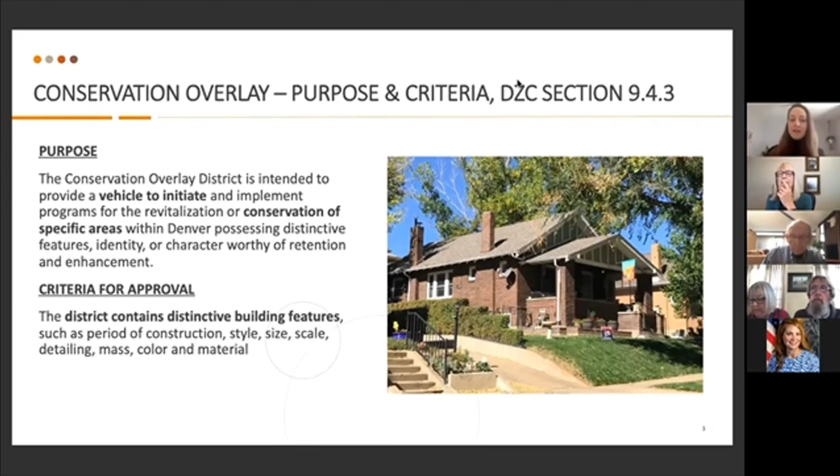So in order to get going on a conservation overlay, you do need to do some good research and categorize and catalog what those distinctive features are. So they could be an age of a neighborhood, style, size, scale, mass, any of these things on the slide here.

And then for those who aren't familiar, the way an overlay works is that it really does overlay on top of existing zoning. So there are rules, there's existing zoning for every part of the city. This can modify some of those things, but it sits on top of it. So baseline regulations stay in place. When there's a difference, the overlay takes precedent. But also, very importantly, conservation overlays can't change uses inside of a zone district.

So for instance, Harkness Heights is a residential neighborhood. It's a residential zone district. This overlay cannot change that base fact, but it can change physically how things manifest.

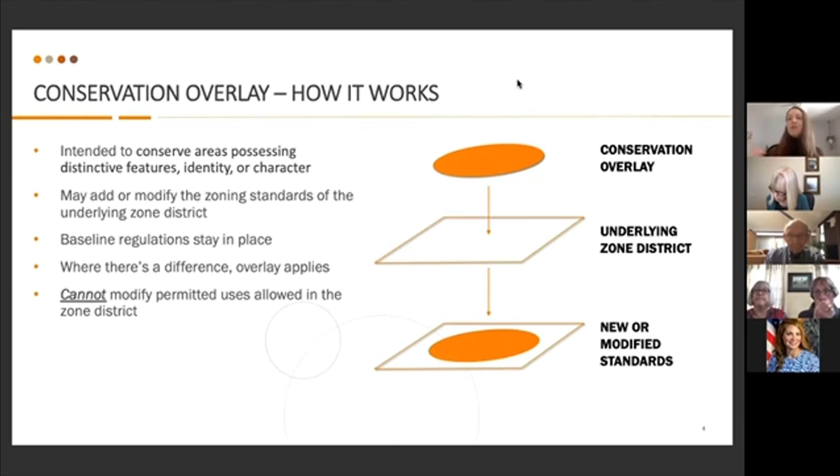So there are currently 5 conservation districts, or overlays, in the Denver zoning code. They're all really, really fascinating. A lot of our inspiration came from the Potter Highlands Conservation. I definitely encourage you to check out some of these neighborhoods like Krisana Park, which is a really fantastic neighborhood, more kind of modern style.

But this would be the 6th. It would be Conservation Overlay 6. And that generic name, the planning department helped us. This was a very back and forth iterative process with them. And the reason this isn't necessarily called the Harkness Heights overlay is because they thought that what we had come up with was so useful to protecting neighborhoods with similar characteristics throughout the rest of the city, that a little more generic name, bungalow, kind of sets it up for being able to be applied other places.

So as for background, where is Harkness Heights? If you're not familiar with it, it's a beautiful neighborhood up here, technically in the Berkeley neighborhood. It's a subset of that. It's relatively small. There are 339 parcels zoned U-SU-C.

So that's a single unit C. The C refers to kind of an average lot size. There's a couple of other parcels in there that are a little different, but we're focusing on applying this mainly just to that zone district.

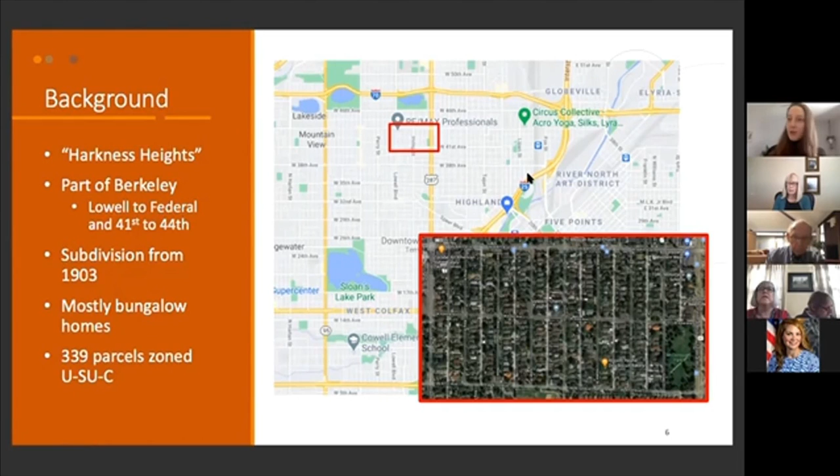And this is a pretty consistent subdivision. One of the earliest subdivisions started around 1903 and the following decades. It's pretty consistently bungalow forms, but there are definitely some 4 squares, there are some Tudors. So there is a bit of diversity, but it's very bungalow.

The concerns that the neighborhood started to have are primarily the ones up on the screen here. And this is kind of what we dialed down into as our guiding principles throughout this whole process. So a big one was scale and massing.

This picture illustrates, and with the caveat, these are horrible designs. They are not meant to be super realistic, but except the one in the middle, that's a typical 1-story bungalow that you would find in Harkness Heights.

The purple boxes on the picture below, that's the bulk plane. That's the invisible kind of glass box that constrains development that can happen under the current zoning code. And unfortunately, for Harkness Heights with these little bungalows, what you are allowed to build inside that box, inside that glass box, is really out of character with the scale and the massing of what's there.

So that's what those 2 kind of monstrosities on either side are. Again, those aren't necessarily super realistic, but in terms of massing, yes, you could build something that big.

So another thing we wanted to address was siting and building width, the relationship of the street. So really, what makes Harkness Heights when you walk down the street? And how can we preserve that? And then privacy was also another value.

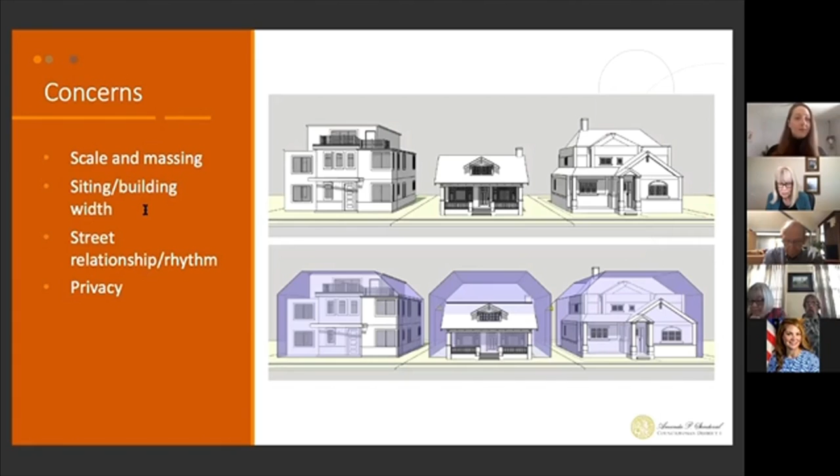The objectives that came out of this was to basically ensure that when new development happens, because it will, because this is not a historic district, it's not completely preserved as is, but when new development does happen, whether that is hopefully not a scrape, but maybe a pop top or something, that it actually feels like it fits in with the rest of the neighborhood more than what we're seeing in other neighborhoods, what can currently happen.

Also, that privacy and solar access is maintained, and that the setbacks and where the buildings are positioned on the lots is maintained. And that there's this rhythm, this kind of rhythm of porches and stairs and 1-story and then 2-story is preserved because it's so cohesive currently.

But that there's also a bit of design flexibility. And that was a lot of community conversations about this. This is a long process of basically keeping to these, drilling down to these core values.

Our process, community discussion started in 2016, maybe before. Tom can pop in and correct me later, he's been instrumental from the beginning. This has been a long process. Former Councilman Espinoza was incredibly involved, and he brought along consultants, PelOna, who worked with the community to develop the first draft, which included tons of background information and research and the foundation for the proposals we used going forward.

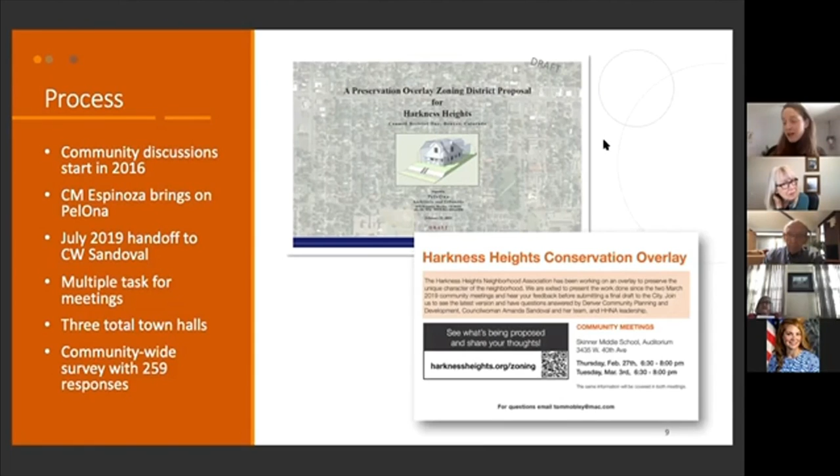Other than that, we had a process that was very, very iterative. If anyone is interested in this in further depth, you're welcome to contact me or anybody else on the team, and we can go into the details. We had a small group of dedicated people who really dug into the details, including myself and sometimes the planning department. We had a larger task force of maybe 20 people. And then, of course, we went back to the entire community as much as we could at certain points. It was this cyclical process of refinement.

So the proposal I'm going to show tonight is a little different than what's been seen over the last couple of years, and that's a result of a lot of work. From a proposal we'd get group buy-in from various levels and then do really significant modeling and testing - talking to architects, myself doing research, and then going to the planning department who provided a lot of really great feedback. From that, we'd come up with refinement and suggestions and maybe a new proposal that we'd then go back and vet with the community.

We went through this process again and again until we came down to final elements that were both easier to administer - the planning department needs to be able to actually administer these things - and make sense fitting in with the rest of the zoning code, as well as adhering to the core values the community has expressed from the beginning. We also took out things that might have been extraneous, or that when we polled the community, people said they didn't want. With this whole process, my biggest advice is to be humble and be flexible and recognize that there's going to be a lot of work involved.

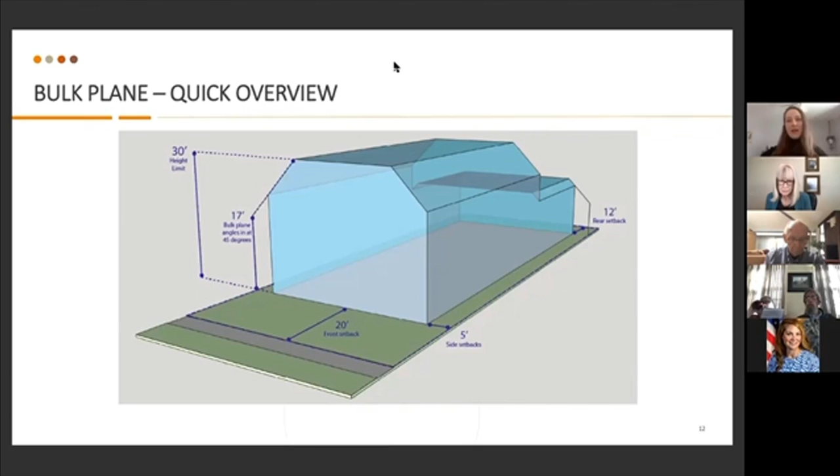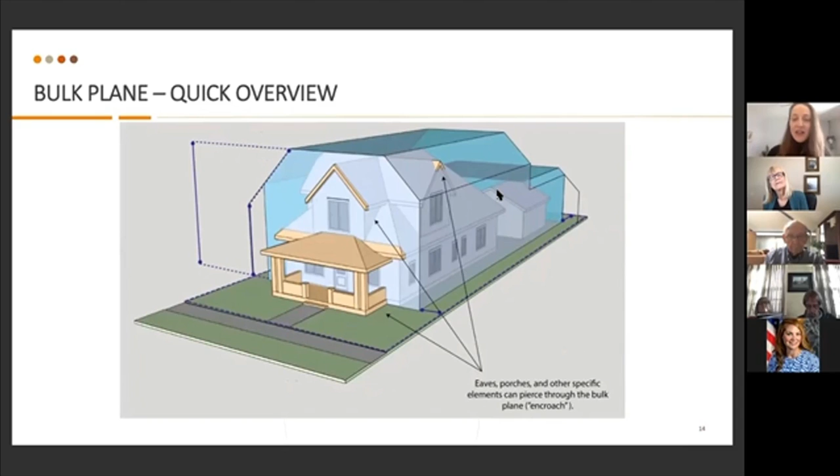Quick overview for those who aren't familiar with this glass box I referenced - the bulk plane is that invisible boundary that contains development to a degree. This is specifically in our zone district, U-SU-C. For a downtown, this box looks very different - like 20 stories high. This is how a house would fit into this glass box, and it's a good example because you can see there are a few exceptions: porches can stick out, some eaves can stick out, part of the top of the roof can stick out. But in general, a house has to fit into this glass box.

So this is what the glass box looks like currently, and I wanted to show this to you because I think it illustrates exactly why we made some decisions and how they're going to help new development fit in better. Currently, you can build up to 30 feet in height, and actually a little higher on wider lots, but generally 30 feet and 2.5 stories.

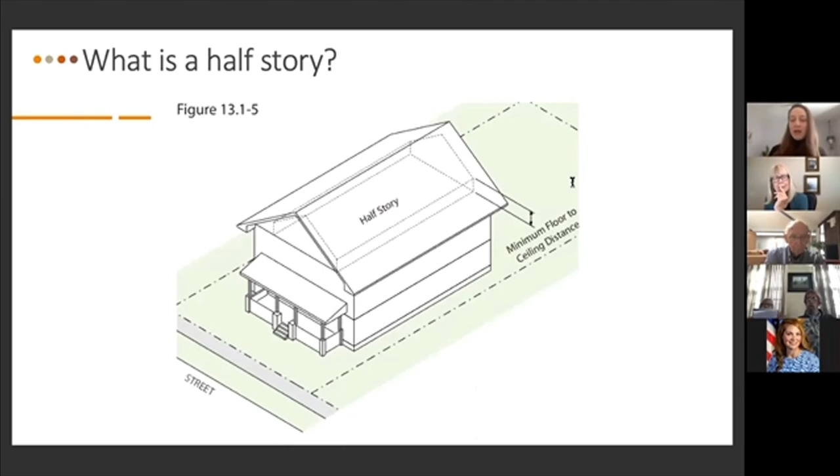So what 'half story' means is kind of weird—it doesn't refer to height, it refers to square footage. So a half story can actually look like a third story from the street. It just means the footprint of that story is smaller than the stories below it. This rule was leading to what people object to as that 'wedding cake' look, or a 2-story contemporary house with a little 'dog house' on top that's access to a rooftop patio. That's why 2.5 stories can allow that.

Then we've got this 45-degree shearing on the side. This helps with solar access and keeps development in check. Currently, it starts at 17 feet up, measured from the side of your property.

Then we've got setbacks—they happen in the front, sides, and rear, and that helps place the building on the lot so it's not crowding the front, the neighbor's property, or too far into the alley. There's also an overall lot coverage limit, but other than that there's no restriction on the square footage of a house. You just can't physically build more than 37.5% of your lot, and that includes garages and everything.

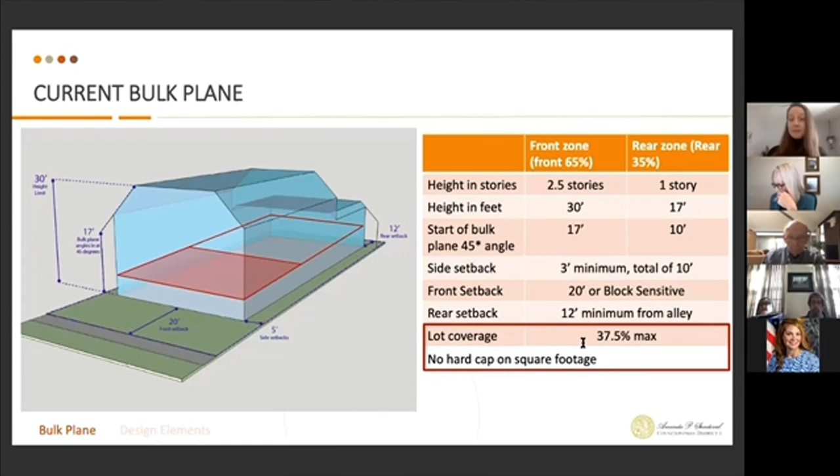So this is what we have currently, and this is what the overlay does—the pink box shrinks that buildable space so that when a new building comes along, it's a feasible building under our new bulk plane, and it's going to look and fit in better than something built under the current bulk plane.

We tested this a lot. Our new bulk plane start height is 14 feet, the start of that 45-degree angle, so that already brings it down a little. We'll have lower height limits, differentiated by pitched roofs versus low-sloped or flat roofs. There are also some changes to the side setbacks, and importantly, the community decided it was valuable to have a limit on square footage. I'll talk about all of these in more detail now.

Side setbacks: Harkness Heights has a consistent pattern of larger setbacks on the south side, likely deliberate to allow sun access in winter and avoid shading the building next door. We wanted to preserve that siding pattern, keeping houses narrower rather than taking up the entire width of the lot, which looks out of character. The new rules are still graduated based on lot width, but mandate a larger setback on the southern side.

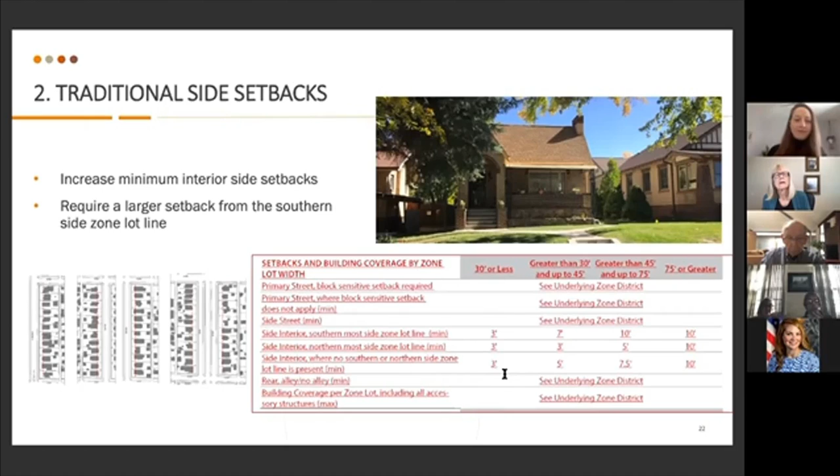Back to the idea of the square footage cap—we had a lot of discussion about this in the community. We based it on the current largest homes in the area; the biggest one is just over 3,000 square feet. This was in response to seeing homes built, especially around the Sloan's Lake area, up to 5,000 or 6,000 square feet, replacing smaller, modest bungalows with gigantic homes that feel very out of context.

There are provisions for an additional 40 square feet for every 100 square feet of lot area—so if you have a gigantic lot, you could build a bigger house, which is how it is currently, with beautiful grand homes especially on the corners. This does not apply to basements, since incentivizing basements was a big goal of the community. A lot of existing homes have basements—it's a great way to add livable square footage without adding to the bulk of the structure above ground.

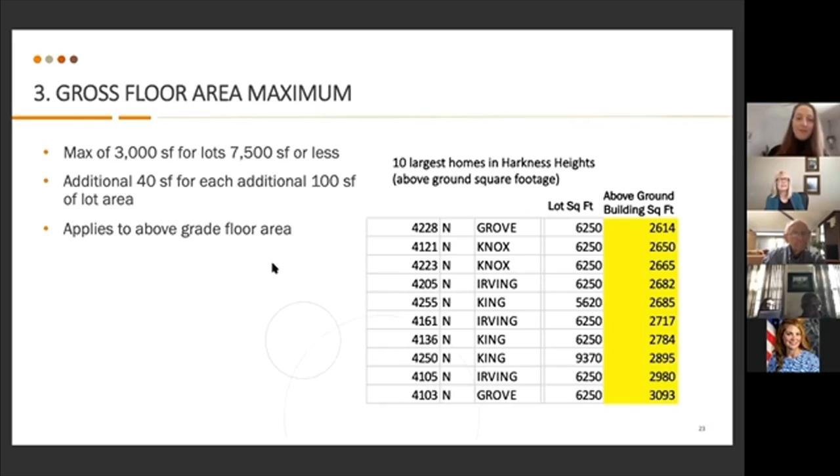Building height in feet and stories: we have two different height caps. If you want a more traditional pitched roof house, you can build up to 28 feet. If you want a more contemporary, low-sloped roof—the technical term for flat in the zoning code—you can build that, but it has to be no more than 22 feet in height.

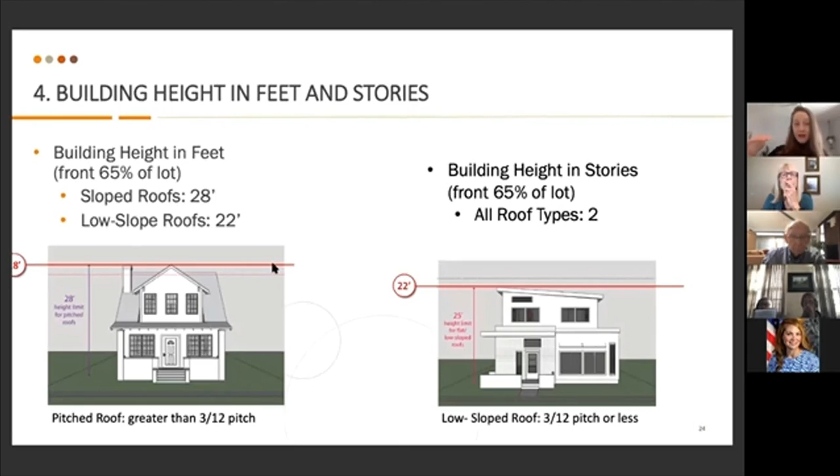In addition, if you build a flat or low slope roof structure, you have to step back the second story. This is to mimic the slope that would happen normally, that sense of mass decreasing you get with a pitched roof, and help it fit in better with the existing pitched roofs in the community.

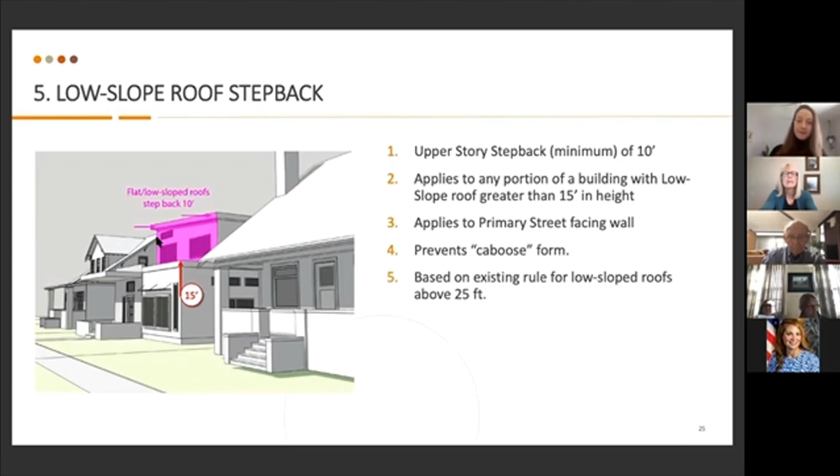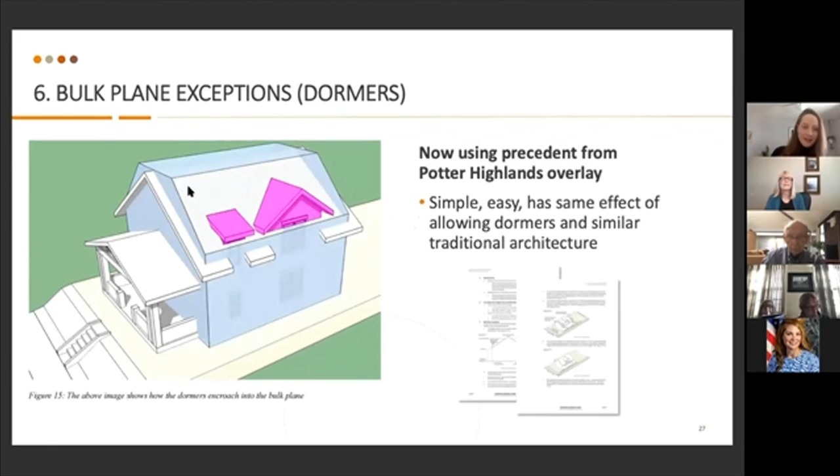And getting near the end, porches, requiring porches. Currently an entry feature or a door of some sort is required if you build a new house. But Harkness Heights is characterized by these beautiful giant porches.

They do a couple of things. They provide a sense of transition from public to private realm, a chance for neighbors to sit out on their porch and interact with other neighbors, as well as this sloping of mass. You have a smaller one-story mass, and then you get the bulk of the house behind it. So it's a super important characteristic, and we are requiring porches.

This stuff applies generally to a brand new build. If you have one of these homes on this page, for instance, and you want to build a second story, you're not going to be required to build a brand new porch if your porch isn't big enough. A lot of these really just apply to brand new builds.

So there's a minimum porch size, minimum porch dimensions, it has to have some sort of little wall or fence around it. It has to have a roof, and it can't be recessed underneath a story. It can't be kind of like a cave that you go into - it actually has to stick out.

And getting close to the end here, upper surface of first floor. A lot of traditional design has a base, then a first story, then the stories above it. Whereas some contemporary architecture, such as the image to the far right, is just built slab on grade. And it disrupts the rhythm that's very consistent in this neighborhood.

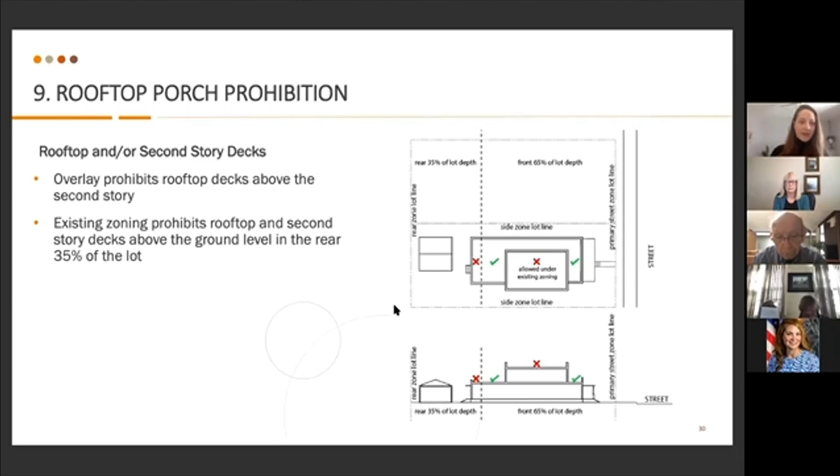But this, similar to Potter Highlands, prohibits rooftop decks on top of a second story. So here's the summary of all 9 elements we talked about, and I will open it up to Q&A - I think we have a good 15 or more minutes for question and answer.

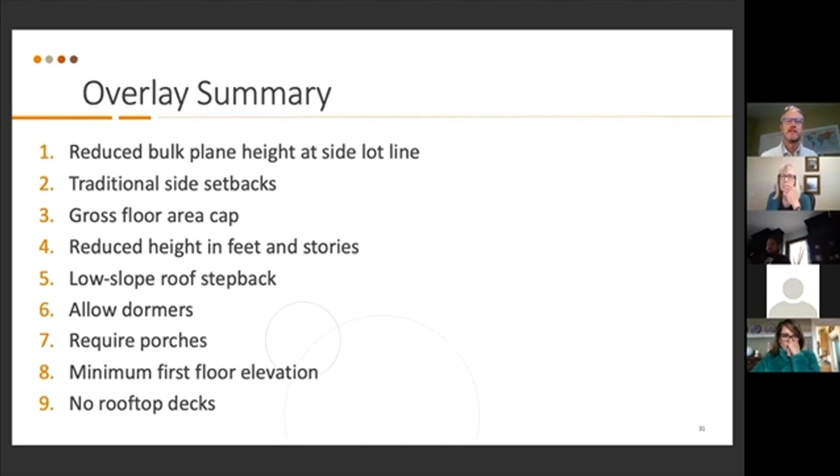Great, I see a question about what date determines historic. That's an interesting one. Does anybody... gosh, wait, before we leave this—the question was asked and not answered.

What if you have an HOA and a conservation overlay simultaneously? If there's a conflict, which takes precedent?

Yeah, that's an interesting question. So basically, an HOA can't countermand zoning regulations, or counter them, for example, by being less restrictive than zoning. So if the zoning said there was a maximum of 2 stories in height, the HOA can't say, no, actually you can build 3 stories. But an HOA, like a conservation overlay for example, could be more restrictive. The HOA could say, no, we property owners have agreed and signed this legal document that we will not build taller than 1 story, even though the zoning allows 2. That is possible. So essentially, when there's multiple things going on, the more restrictive of the things is the one that will take precedent.

I want to note though that HOAs, again, that's not a city thing. That's just a private legal agreement among property owners. And in some cases, the city wouldn't necessarily even know what the rules were unless we dug into the legal details of them, because we're not enforcing those rules. It's just privately enforced.

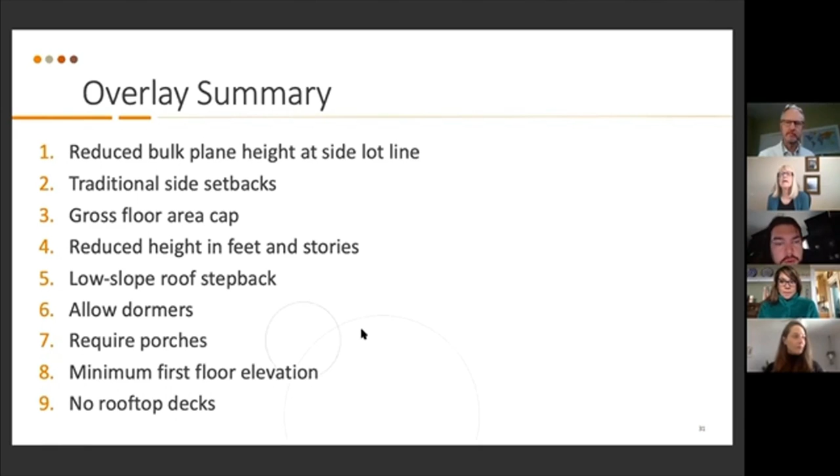So I see another question from Mark. Harkness Heights doesn't allow accessory dwelling units right now, so we didn't build for that. That was something Harkness Heights had a long conversation about. We don't have any regulations on ADUs at this time because they're not allowed within the zoning. Everybody would have to apply individually to get an accessory dwelling unit. That's a good question because we had that same question asked at the Denver Planning Board, so maybe we can take that on if that's what the community and residents of Harkness Heights would like us to do. But for right now, it's not within the zoning code, so we did not address accessory dwelling unit height regulations.

Amanda, this is Tom. Just to add to that - you were at that meeting. One of our very first organizing meetings of our group was that question. We raised it: did we want to include any discussion of ADUs in the overlay? There was a strong feeling among the group that it would have been very difficult to address in that format and very controversial, so we deliberately left any discussion of ADUs out of this overlay.

I'll also add, I have the slide up here too. None of the changes we're proposing actually alter the rear zone. The lot's divided into a front 65% and a back 35%, and detached ADUs have to live in the back 35%. But these rules, except for side setbacks, wouldn't impact anything back there. Detached ADUs have their own set of standards that we didn't touch. We've done some looking into this and modeling, and even though this is hypothetical since they're not allowed currently, the rules that would affect how a detached ADU could be built aren't being impacted by the overlay.

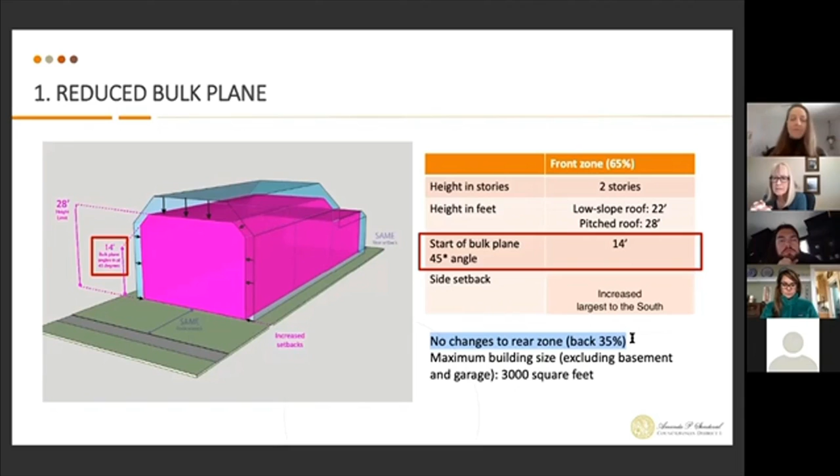Just want to time check you, Naomi. It's 10:10. I see one more question here about whether a Chapter 59 area has to change to a new zoning before adopting an overlay.

I do want to answer a question really quick. I saw a question earlier about historic significance. My understanding as a trustee of Historic Denver is that when they set a historic district, they pick a period of time of significance to peg everything to. It's also my understanding that something has to be at least 50 years old to even be considered for this, because there's been conversation about the post-World War housing built in southwestern Denver and whether that will one day become historic or not.

Thanks, Ian. Abe also put in a little more detail about historic districts in the chat. So thanks, Ian - I think we should move on to our next overlay. Again, if anyone has further questions, feel free to put them in the chat and we can reach out to you later to answer them. I'm going to put my email, naomi.grundwitz@denvergov.org, in here so you can reach out to me personally, and the district office email as well - that'll go to all of us.

All right, I will try to move through this a little more quickly so we have time for Q&A, but I think you'll all be excited about this overlay as well: the active centers and corridors design overlay. It's a bit of a mouthful. Same background - we'll briefly talk about how this overlay differs from the other project background, and then what's in it. Yes, we will send the presentations out so you can review them, and this is being recorded.

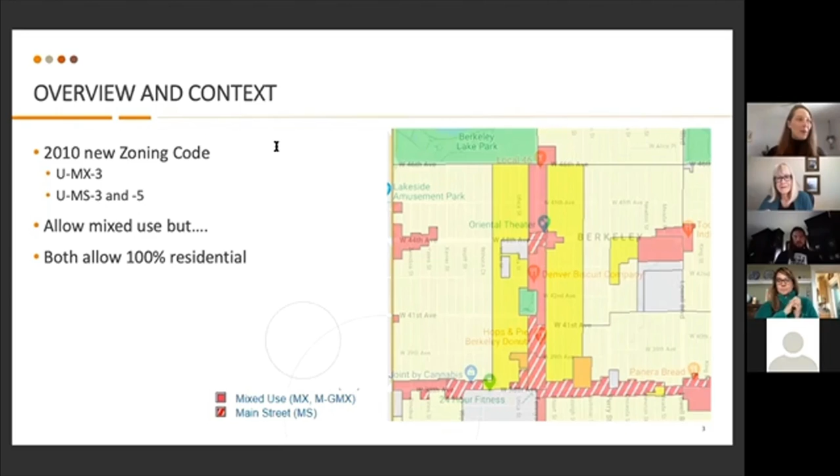So, the active centers and corridors overlay is specifically about traditional shopfront commercial corridors that, in the new zoning code from 2010, allow mixed use but also allow 100% residential. If you've been to Tennyson Street in the last 10 years, you probably know the changes we've been talking about that the community's been concerned about. These discussions - and Christopher Johnson, our planner from the city who's on the call, has been involved with BRUN talking about this for a long time - go back with Councilman Espinoza. These concerns have been brought up along Tennyson, and in other districts as well, along South Pearl and Santa Fe. So the overlay we've developed with BRUN and with CPD is meant to also apply to some of these other small-scale traditional streetcar commercial nodes, as you can see here.

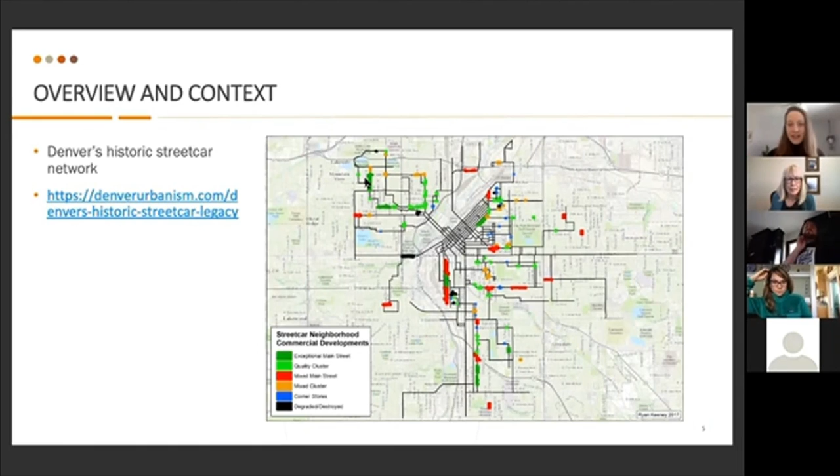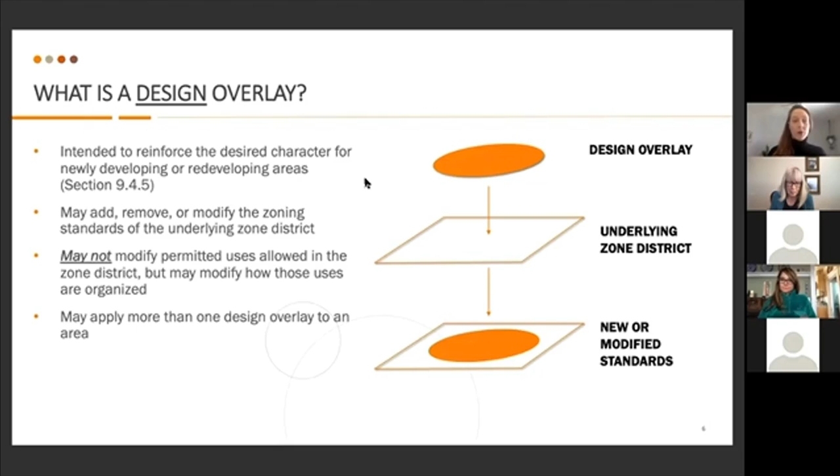This pattern led to commercial areas that were very walkable, super mixed use, and really pedestrian friendly. That's what this overlay is trying to preserve. This is a design overlay, not a conservation overlay. A design overlay is meant to guide development as it changes and redevelops. It can preserve existing patterns as well, but it's geared more towards what new development will look like. It can't deny uses that are already allowed, but it can modify how those are arranged in buildings. That's how we're coming up with one key component of this overlay, which is to require non-residential uses on the ground floor.

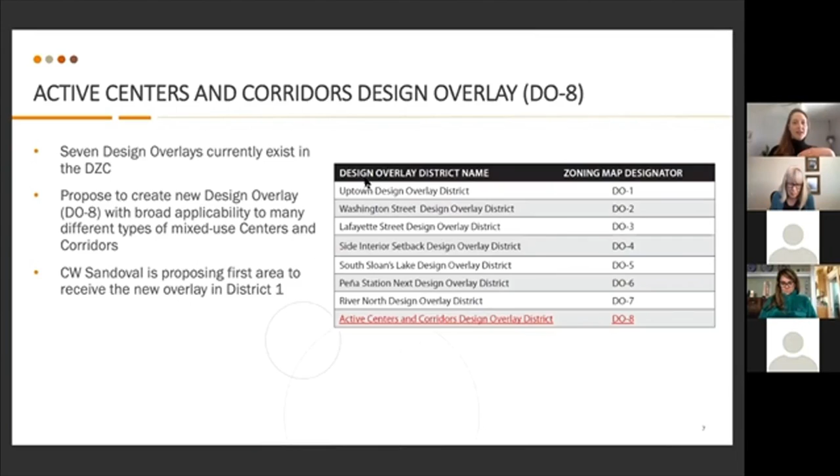There are quite a few design overlays that exist already. This would be number 8. The first area it would be mapped to would be along Tennyson, up here in these areas. I think I have another map later on. Sorry, I'm rushing through this a little bit.

Our process, again, was a very long, detailed process with BRUN. We've done town halls, which were right before COVID, like the last in-person thing that we did. We've also reached out to property owners with individual mailers, had calls with property owners, put out media advisories, and have a landing page that people can visit.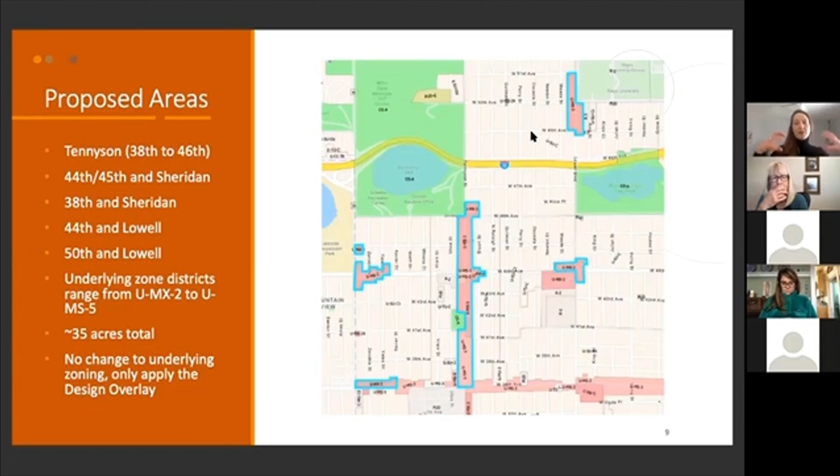I'm going to go through those real fast. The meat of this overlay, probably the most important part, is that we're not saying you can't have residential, but we're changing where that's arranged in a building. This standard says that for the majority of the ground floor on a building built in these areas, you cannot have an actual dwelling unit on the ground floor. It has to be some sort of commercial for most of it. There's a little wiggle room for smaller lots and smaller storied areas in depth, and you're allowed to have a lobby or something for residences above. But for most of the larger lots getting redeveloped, you'll have to have some sort of commercial on the ground floor.

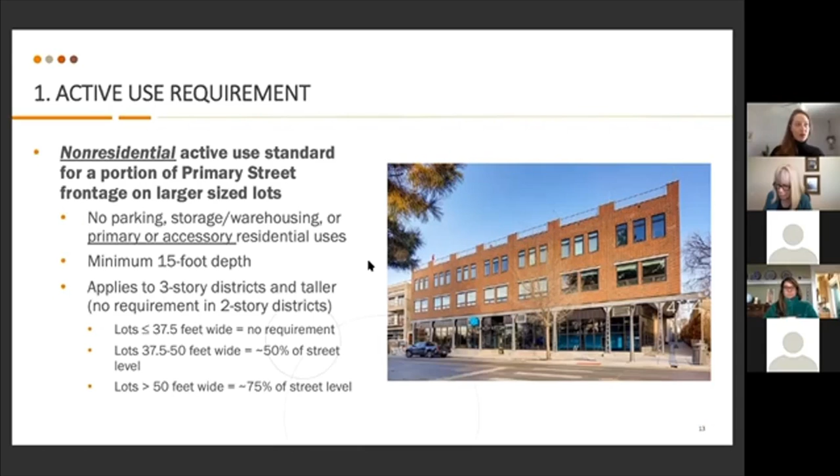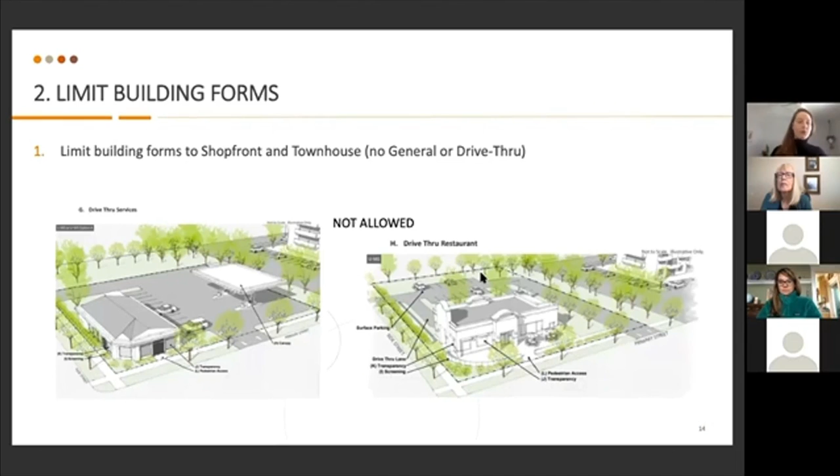Another thing the overlay does is eliminate drive-through forms, which are currently allowed on street corners in very specific cases, basically saying that drive-through forms are not appropriate for a small walkable shopfront area.

There's also an increase in where a building can be set relative to the sidewalk, to help create space for outdoor patio seating, things like that. Currently the standards are very limited, which is great for creating a consistent street wall, but also means that outdoor dining, which is really important now, tends to end up in the sidewalk, which isn't great for people passing by. If we have a bit more wiggle room for where the building is sited, there's more room for vibrant outdoor space, and it's not shoved into walking paths for people.

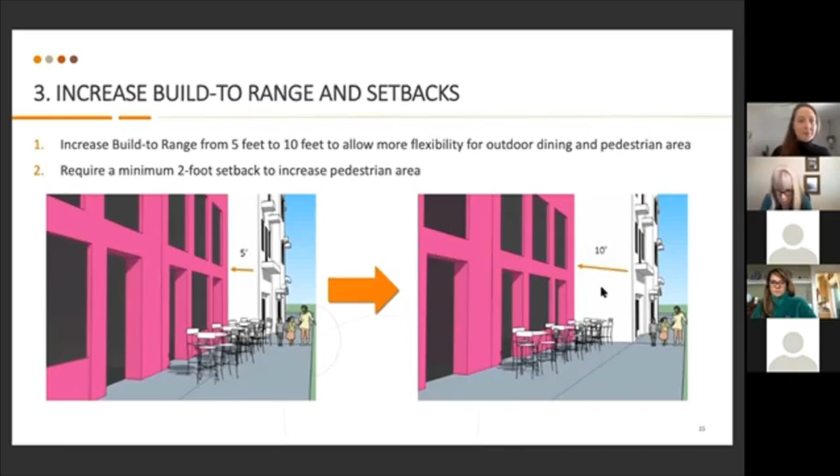Here's another really important element: most of the ground floor can't be residence, but in the places where it can, if you do have a dwelling unit on the ground floor, there has to be a setback. That dwelling unit can't be right up to the sidewalk. There has to be some outdoor space transition to the private realm, creating basically the pattern you see in these examples down here.

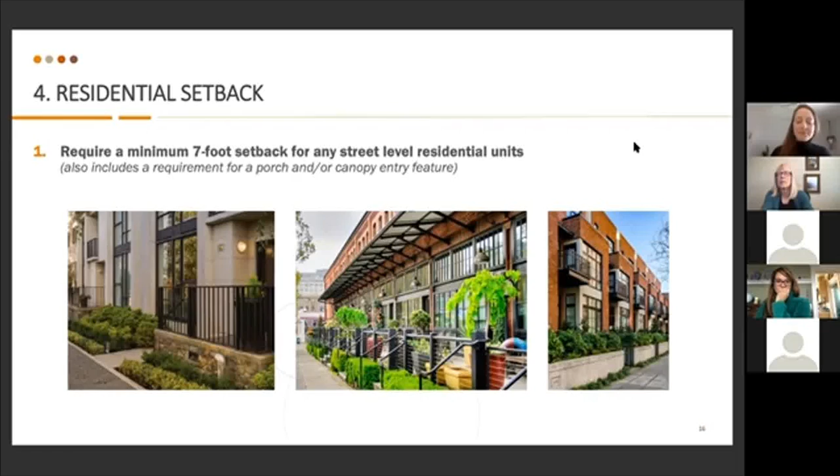Another thing we did is got rid of a kind of loophole, it's a little technical, but we know windows are so important. Windows on the ground floor are incredibly important for commercial spaces and for enjoying pedestrian activities along the street. So we reduced the alternatives, things that can substitute for windows, restricting that only to permanent art. This is not a great example of permanent art, but it illustrates the concept of how that space can account for windows. Permanent art is actually a really high standard that has to go through Denver Arts and Venues, and it's meant for very exceptional works of art on a building's wall.

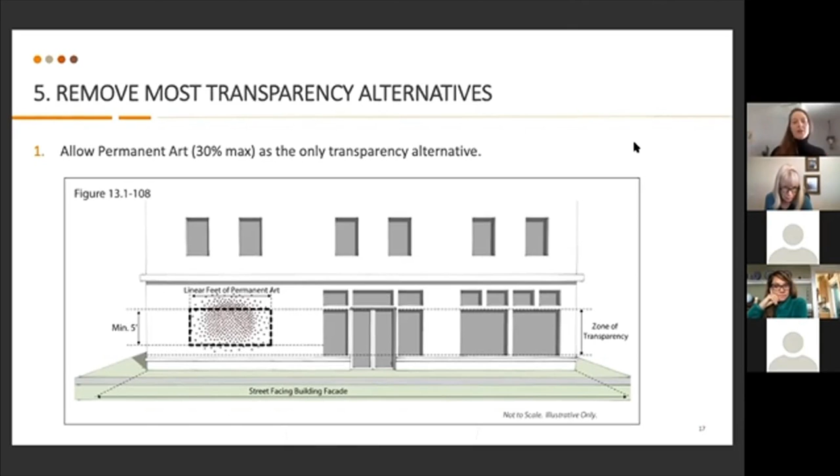And then first floor height. This is just a really good standard design practice that we're seeing happen in other parts of the zoning code and other overlays as well. Commercial space that is successful generally has taller ceiling heights. So we actually went and I physically measured with a measuring tape the heights of the storefronts along Tennyson to help us get to these numbers. So when a new building is built, that commercial space has to have a floor-to-floor first floor height of 14 feet. That'll help the commercial uses there end up being more successful and align better with the existing commercial spaces.

So that's it. It's a little bit simpler one, only 6 main elements, and happy again to open it up to Q&A. Christopher here is incredibly knowledgeable. I know we've got some of our lovely neighbors from BRUN also on the call if they want to chime in, and I'll let them go.

So I see in the questions, is the reason for creating the design overlay that requires commercial goal... It really comes from the community. When we had the big gathering with Councilman Espinoza near Holy Family, I want to say it was 2016, that was something that we gathered comments on, and it was a continual comment and continues to be a comment in Northwest Denver that we are losing commercial along Tennyson, and it is only turning into all residential. The neighborhood is very nervous about losing this commercial neighborhood serving retail. So it was really what the residents and the business owners along Tennyson have asked of the council office.

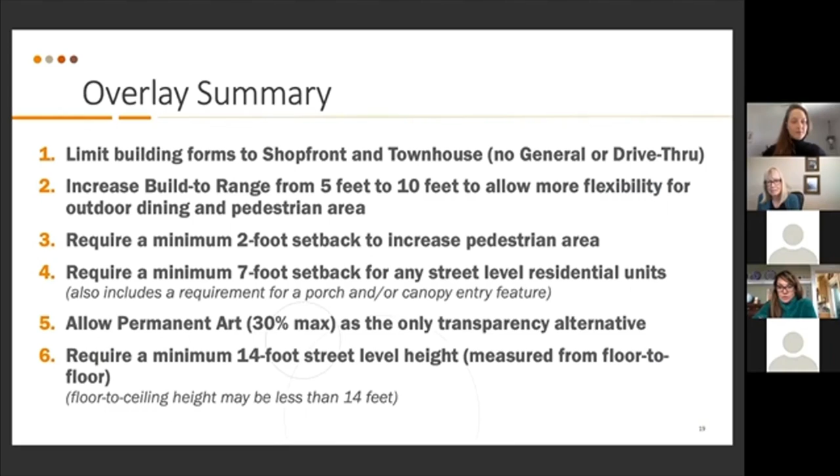And in full transparency, my father used to own a building on the corner of 44th and Tennyson from 1975 to 2012, so I know how active that corridor is. I basically grew up on that corridor, and we are losing some of our small commercial retail nodes. So the goal of this overlay is to require 75% of all new builds to have commercial, or it doesn't always have to be commercial, neighborhood serving retail.

Well, I'm just wondering, if you're losing it, are you losing it because it's being converted into residential? Correct. Only new builds.

Yeah, thanks, and that's a really good distinction to bring up. So these are thriving business spaces. COVID has kind of changed everything, but hopefully there will be a recovery. What has threatened the commercial nature and shopfront nature of these areas is not necessarily economic loss of businesses. It's the fact that business spaces are literally being torn down and replaced with completely residential construction, not even space being provided. Of course, newer space is always going to be more expensive than older space, but the new buildings going up have radically changed the environment of the street, not even providing ground floor commercial space for the opportunity for those kind of uses to come back. That's part of what, in addition to some design factors, has been really concerning for the community and the other business owners there too, because business thrives off of other business, and getting that density - this has been an arts corridor for so long - there is literal loss because of forces of redevelopment coming in and removing business commercial space and not replacing it.